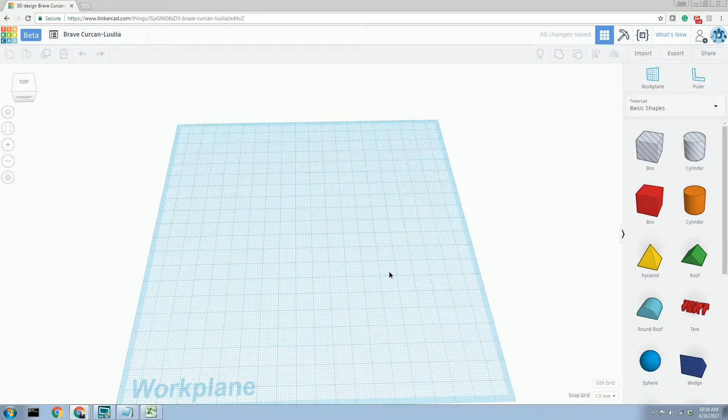And here is our workspace. We've got our blue work plane here, a piece of paper if that helps you visualize what we're going to be doing and where. You can make this a bit bigger with Edit Grid. It is by default 20 centimeters by 20 centimeters. You can also change everything to inches. I tend to leave everything in millimeters because at the sizes we're working at, it's a little easier to look at 1 or 2 millimeters versus 1/72 of an inch or whatever. So I leave these all the same. Go ahead and cancel.

You see me moving the work plane around here. These are the camera controls. I'm doing this by holding the right mouse button down and dragging my mouse. If I ever get all discombobulated, I can come up to the top left corner. There's the home view. Give that a left click and it takes me back to the home view. I can also zoom in and out using the scroll wheel. I can also do most of these with the hardwired buttons in the viewer itself. If you come over here to this box in the top left corner, you can drag that around as well. They also have the zoom in and out buttons here, and then they have an orthographic view which takes you straight into each axis there.

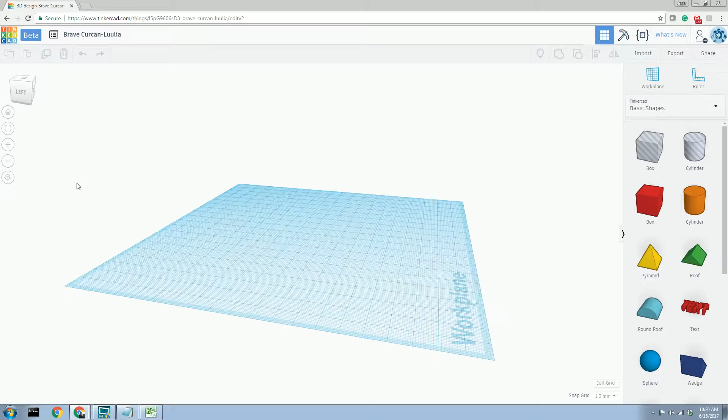I tend to use perspective for about 98% of everything, and then maybe orthographic if I'm trying to make sure I've got two different models joined together or sections put together correctly, so when I go to print it I'm not getting a gap somewhere I'm not expecting.

Up here at the top, if you click this TinkerCAD button, this will take you directly back to the landing page. This says beta. Like I said before, this used to be called their beta editor. They just haven't removed the tag. My designs here, if you click that, will pull up everything you've got in your design gallery. And next to it here, whenever you make a file, TinkerCAD automatically generates a name for it. Brave Curcan-Luulia. To change that, you just click on it, and we'll type in 28mm barrier video. Now, because it is cloud-based, every time you make a change to your design, it is automatically saved.

Underneath the title here, these buttons have shortcut keys that I tend to use more often, but you can use the menu buttons here. So copy, paste, duplicate, Control D, that's useful. I don't know if we will cover it in this video. Delete, and then everybody's favorite button, undo, and then the second favorite button is redo.

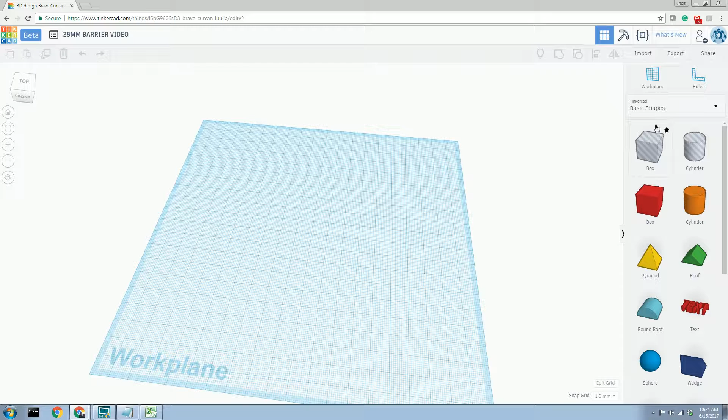Share, you can email the file or do a couple other things. I tend not to do much with that. It's usually just export. Under these we have what they used to call the helpers, work plane and ruler. We already have a work plane by default. Like I said, it's kind of your piece of paper, but you can adjust that. You can bring a shape down and put the work plane on a different axis, and then that changes things around. I've never actually had to use that, so I don't know much about why you would do that.

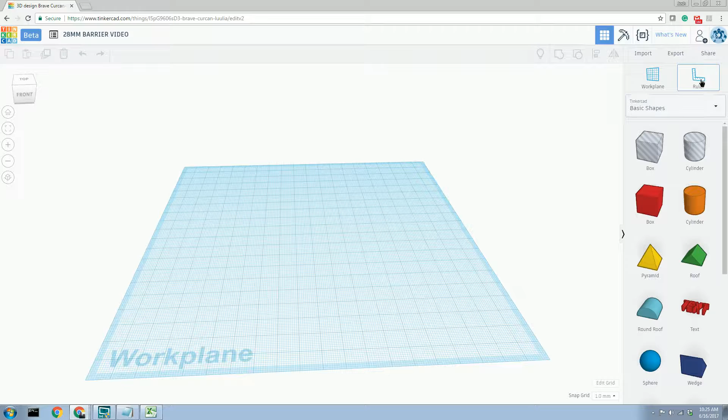Ruler, incredibly useful, and that'll be our first action here. We're going to pull the ruler onto the work plane by holding the left mouse button down while hovering over the ruler and just dragging the mouse over to the left corner. If you don't have the ruler down as you pull shapes in, you don't have the measurements, and it's a lot harder to change the measurements. If you're just playing around, you definitely don't need it, but if you're trying to make something fit to a specific size, you're definitely going to need to pull that ruler out. And you can remove it, so if you decide you really don't need it, you can just hit that little dismiss ruler there and it goes away.

Underneath this is your menu options for your shapes and actions. Everything we're going to do today is under these basic shapes. Other design programs call these your primitives. Your box, your cylinder, round roof, cone, polygon. You will maybe notice if you're looking at some of these round objects, they're actually faceted. That is one of the biggest limitations of TinkerCAD. There's a couple workarounds which we'll cover in another video, but it is something to be aware of.

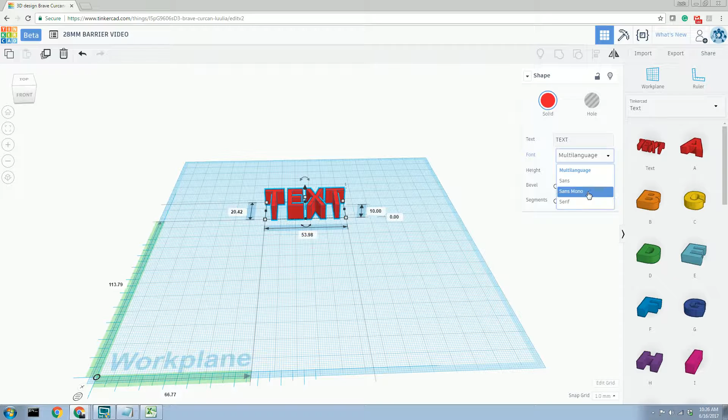Text next. So they have a text generator, which is kind of nice, so you can write out your phrase or your string of text, and it automatically does it. There's a couple of fonts that you can choose from. Just pull that out. Not anything you'd be really familiar with, but a sans serif, a monotype, and a serif one. Just go ahead and delete that. Or, especially if you're doing single letters, you have individual letters that you can pull onto the work plane and string your phrase together. In another video, we'll cover making text in a different program and importing it into TinkerCAD, so you can choose your font and stuff like that.

So symbols, we're not going to run into a lot of these for wargaming terrain. Connectors and extras, we'll cover in different videos, but they do exist, and feel free to take a moment and play around with it. Go back up here to basic shapes. So, like I said, we're going to do a jersey barrier here, and I have found at AmericanConcrete.com this fancy little JPEG that gives us all the real world 1:1 scale dimensions of a jersey barrier. Now for 40K, 28 millimeters is nominally 1:56 scale, but if you've ever played 40K, GW kind of does whatever they want with their scales. So I tend to use 1:40 for the terrain because it looks a little beefier and fits a little better with the aesthetic of the rest of the things going on.

So I have already taken the liberty of creating a spreadsheet with the 1:1 dimensions broken down into all the popular wargaming scales. So here's my 1:40, 1:56 or 28 millimeter scale, 1:72 or 20 millimeter, 1/100th for 15 millimeter, and 1/285th for 6 millimeter. So this one's going to be in 1:40 scale. The next one I do will probably be in 1/100th for Flames of War and that type of thing. So let me go ahead and minimize that. I'll go back to TinkerCAD here.

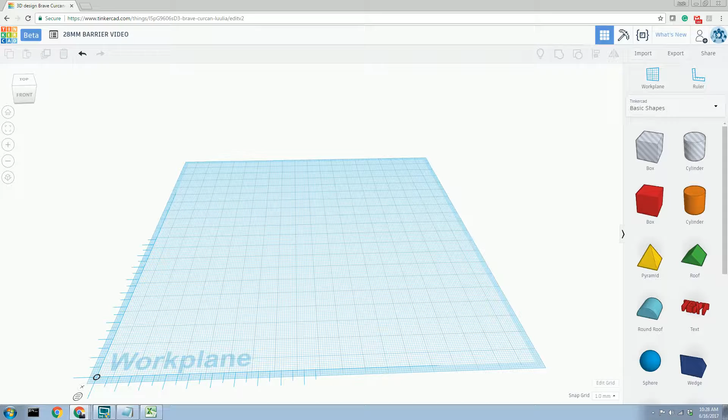So let's go ahead and start building our Jersey barrier. We're going to start off with a box, and we're just going to pull that onto the work plane like we did with the ruler. So we just hover our mouse over the shape, left click, and drag it on. When we do that, a whole bunch of stuff shows up around our box. Because this is a three-dimensional program, remember, you'll now have the x-axis, the y-axis, and now the z-axis, or the vertical axis. By default, everything you pull into TinkerCAD is 20 millimeters.

So around the perimeter of the object, we have these white boxes with black outlines, and in the middle of each axis here, we have these solid black boxes. The white boxes with black outlines are our two-dimensional manipulators. What that means is I'm going to hover my mouse over one of these boxes here, left click, and move my mouse. And as I move it, I can change the dimensions in the x and y axis. And if I slow down and do that, you can kind of see the dimensions change there.

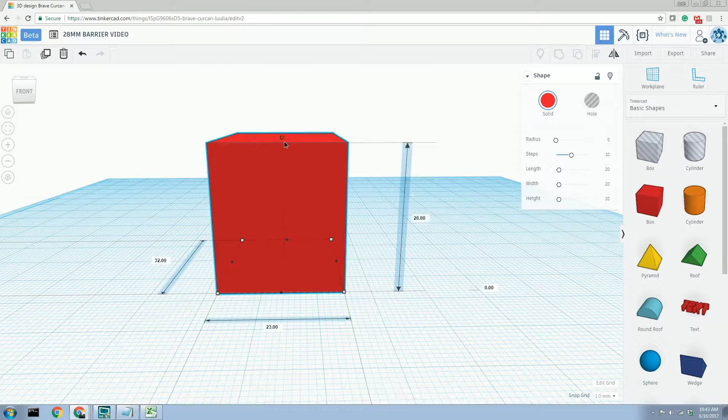The solid black boxes are our single axis manipulators. So same deal, I hover my mouse over, left click, and as I move my mouse, I'm just making this box longer in the y axis. However, to confuse the situation, on the top, or if you're looking at it from the bottom, you get this white box with a black outline, which should be a two-dimensional manipulator, but it's not. So when we click that, it just makes the z-axis longer. My assumption there is the white box with the black outline, as opposed to a solid black box, will help it be a little more visible and usable that way.

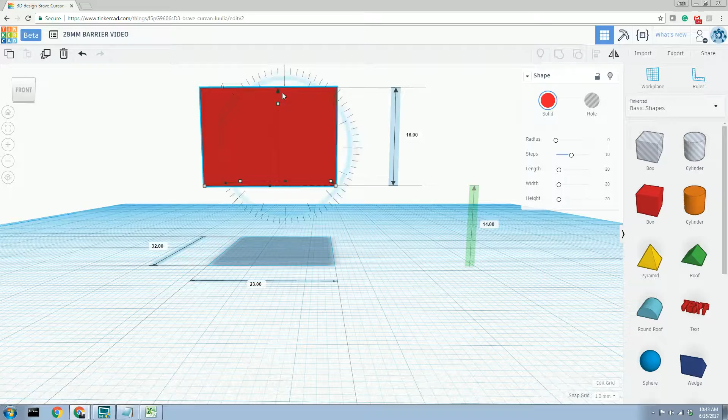Above that is the little black arrow shape, and when we click that, it will physically lift the object off the work plane. And as I do that, over here, this field becomes active, and this is your height off the work plane, or I guess it could be under the work plane as well, because you can put things under the work plane. And that is, of course, denoted by the negative in front of the number. To change any of these dimensions, I can also simply click into the respective text field. It'll highlight the number and I type in my new dimension. So in this case, I want this to be flat on the work plane, so I will type 0 and hit enter, and there we go.

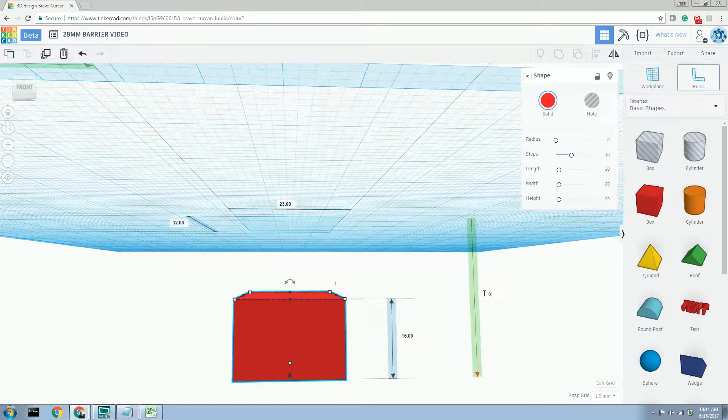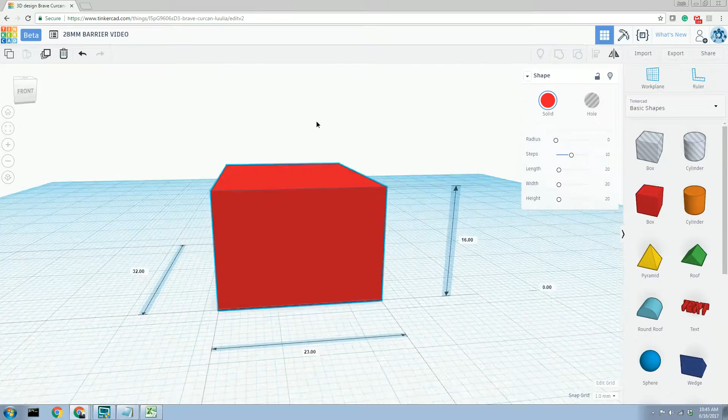I'll zoom back real quick over to our Jersey barrier, and we're going to look at this. So we know that the base of our Jersey barrier here is 10 feet long by 2 feet wide. I'm going to go back to my little scale here, and I know I'm going to need this at the 1:40 scale in millimeters to be 76.2, or exactly 3 inches long, by 15.25. So I'm going to leave this up in my second monitor, but go back to TinkerCAD, and let's go ahead and get this. So our x-axis will be our length here, so 76.2 by 15.25.

So looking at our scale drawing here, we see that the base of our Jersey barrier, the little rectangular shape, is 3 inches. Now, doing our math, that ends up to be just slightly under 2 millimeters. I'm going to go ahead and flub that number and make it 3 millimeters, both for printing and just to give it the correct appearance as opposed to direct scale. So I'm going to come back over here to TinkerCAD, click in the z-axis, and hit 3 millimeters. And there's the base of our Jersey barrier. That doesn't look like much yet.

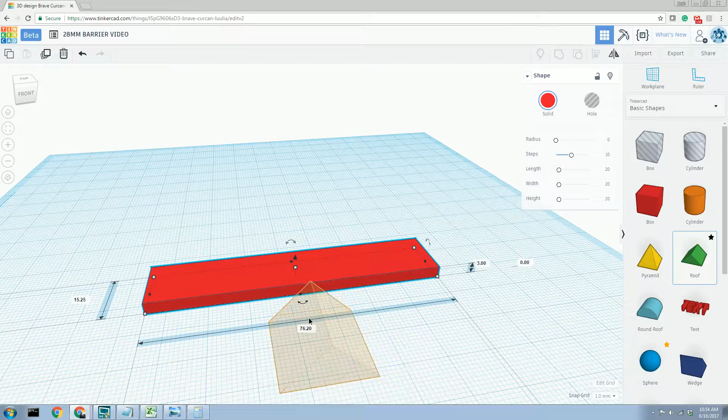So I'm going to go back to our picture here, and the next shape we're going to try to get is this kind of pyramidal shape here. So I'm going to come back here, and luckily they have the perfect option already for us, the roof shape. I'm going to left click that guy and just drag him on the work plane. Now he is at the wrong angle for us to use. So that'll cover how to change an angle of an object.

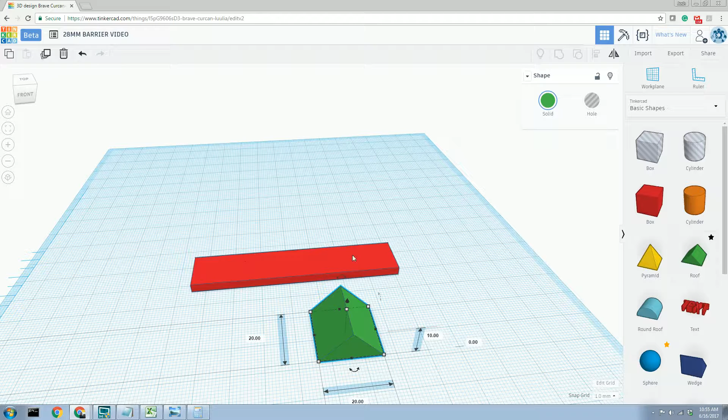So as you kind of look around the shape, you have these curved black arrows. These are your angle manipulators, and depending on what view you're looking at an object from, 1, 2, or all 3 manipulators will be visible. So I'm going to kind of look around, and I need to change my roof here to be parallel with the rectangle we made.

So this arrow looks like it's going to do the job. So I'm just going to left click on the curved arrow, and I can do this 2 ways. I can hold the left mouse button down and move my mouse. If I keep the mouse close to the object that I'm turning, you'll see it does these 22.5-degree jumps, which if you're trying to just get to like 90 degrees or 180 degrees is by far the best method to

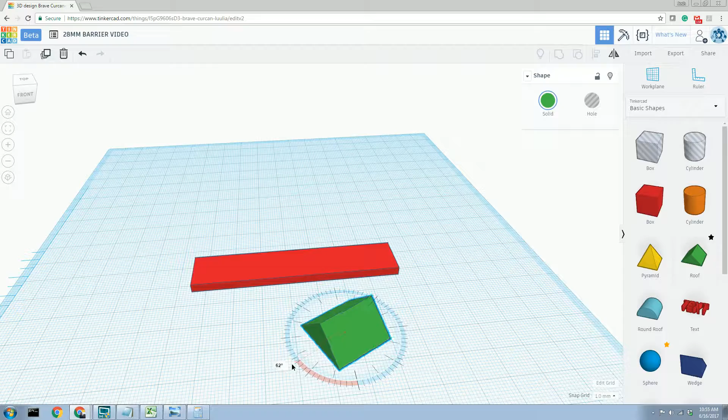do. But if you're trying to do stuff a little finer controlled, if you pull the mouse outside the ring that surrounds, the little protractor ring, it will allow you to do single increment adjustments here. So I'm going to go ahead and get it to 90. So we have this, the correct orientation, perfect.

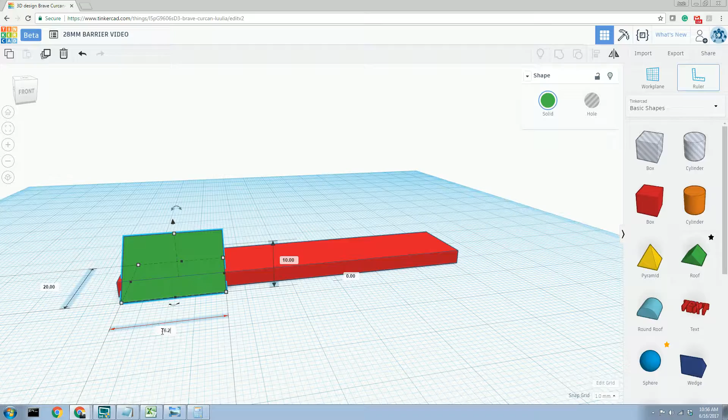And I'm just going to drag this kind of onto our base. It doesn't have to be perfect. So, in fact, I think I got that a little too close. Let me just, there we go. Now we know this is going to also be the 76.2 millimeters long, the 3 inches long. So let's go ahead and get that there.

So I'm going to go ahead and we're going to lift this roof shape, the triangular prism shape here, off the rectangle. And again, to do that, I'm just going to grab that little black spear shape and just kind of pull it up. So I can look at my chart, or I can just click on the rectangle again. Maybe, there we go. And I know that's 15.25, so I'm just going to click our roof and click 15.25 again. And you'll notice when I do that, the alignment shifts.

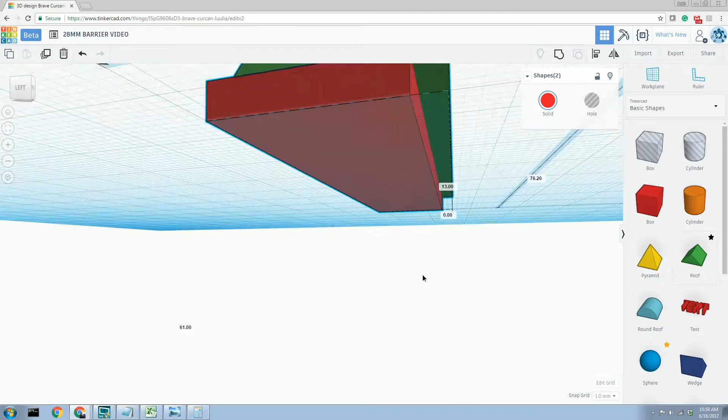So I can do the alignment again. I can draw the selection box, or if you have a lot going on, a lot of shapes on here, and the selection box will just be too big of a tool, you can simply hold the shift button down and click each shape. And now you can tell they're both selected again because of the blue halo around everything. Must not have clicked it. And sometimes the alignment marks kind of move on you. There we go.

Go back to our drawing. We see this shape last for about 10 inches, more or less. Again, we can't perfectly copy that kind of curved angle there, but again, we'll get it close. So 10 inches tall. I'll pull up my little cheat sheet. And we know 10 inches is, in 1:40 scale, about 6.3 millimeters. So I'm going to click the triangle, and I'm just going to click over here and hit 6 millimeters. Well, we're starting to get somewhere.

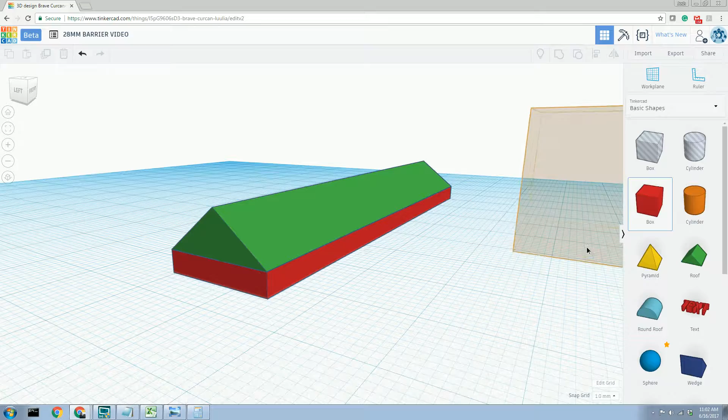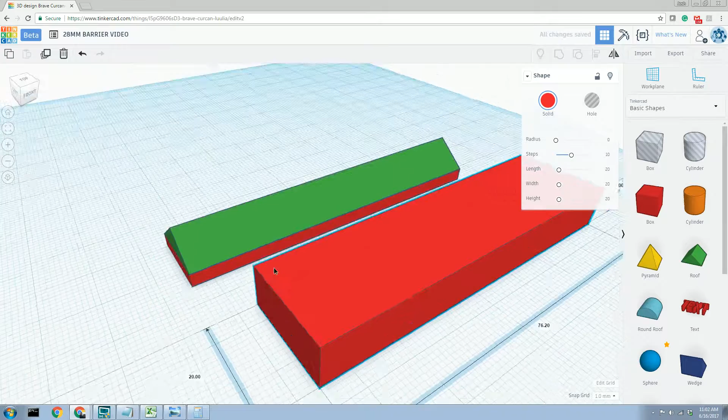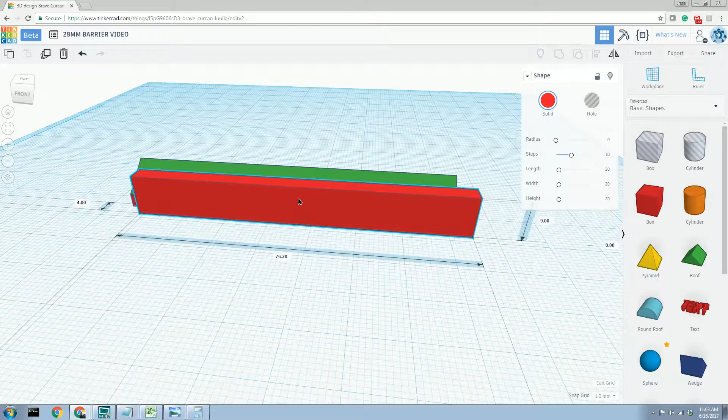But we need to figure out what the y-axis is. So I'm going to come over here and see that 6 inches is 3.81 millimeters, or we'll say 4 millimeters. So let's go back to TinkerCAD, and the y-axis is 4 millimeters. Let's move that around. Good. I'll kind of drag this over, and we'll use the align feature here in a second. And then I'm going to drag.

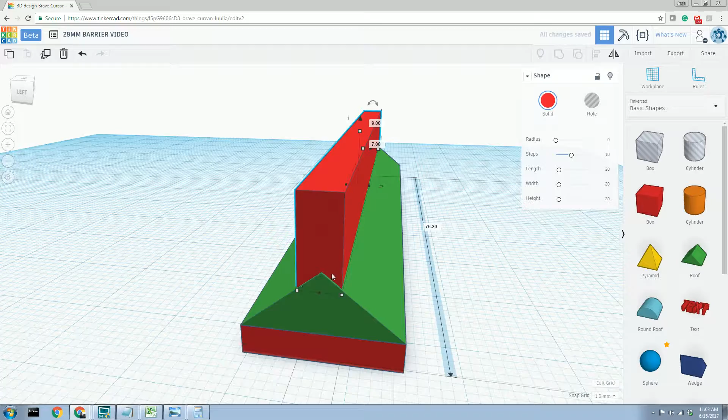Now this is going to be a little less precise. I'm going to grab my arrowhead shape and pull up, and I want to kind of truncate that pyramid shape. Get this all aligned again. There we go. And we have a very Christmassy looking construction barrier, and fix that. We can do a couple things, but the reason it does that is by default all these shapes come out in whatever color they show up as in the basic shape generator over here on the right.

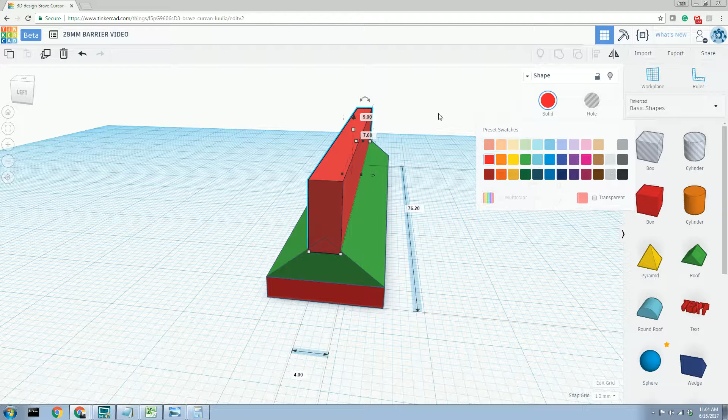To change that, we can click each individual shape and come up here into what they used to call the inspector, and there's a solid or hole button. We'll cover the hole in a minute, but you can just click the solid button and choose whichever color you'd like. This will have no effect on how it prints, just kind of like a black and white copier. It comes out in whatever color filament you have in the machine as opposed to whatever's on the screen.

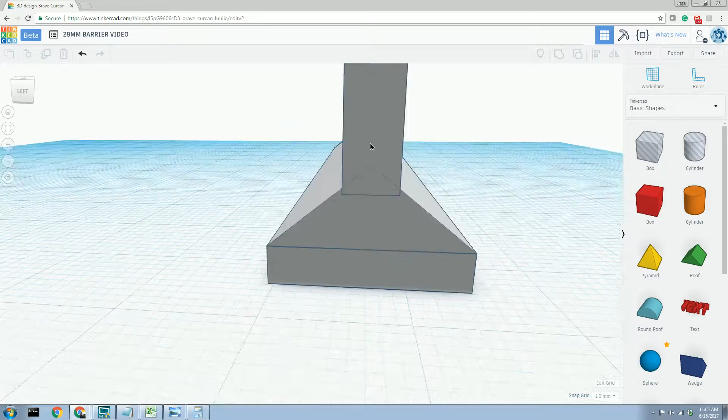I'm going to go ahead and click gray, and I can do this each individual one, or I can select everything and come over here and choose gray, kind of give it that shape. Now I'm looking at this and I feel that this vertical part here, this vertical rectangle, isn't long enough. It just doesn't have the right feel for me. And that's a lot of times in scale work more important than being truly accurate, especially for wargaming and stuff like that. We're going more for the impression of the object as opposed to a perfect tiny scale replica.

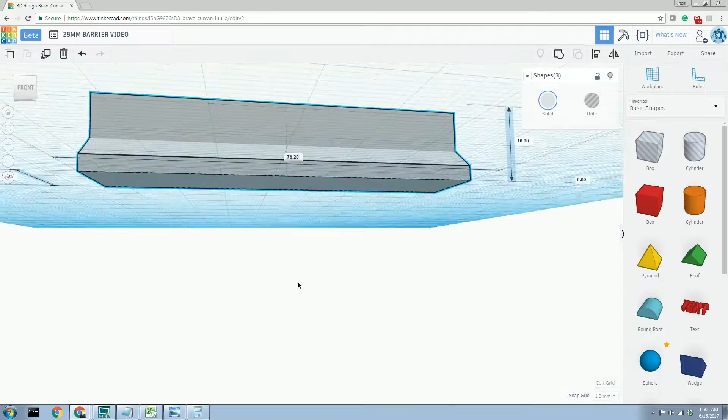So let's go back to my little scale drawing, and so our overall height then should be 2 feet 8, which was the 32 inches, which is, pull that up, 32 inches, so it should be about 20 millimeters tall altogether. So let's go back to TinkerCAD, and to find out if the entire shape is that, I'm going to draw the selection box over everything, and so it looks like putting this rectangle, the top portion of the wall, kind of under the pyramid has caused that problem. That's probably about 4 millimeters there.

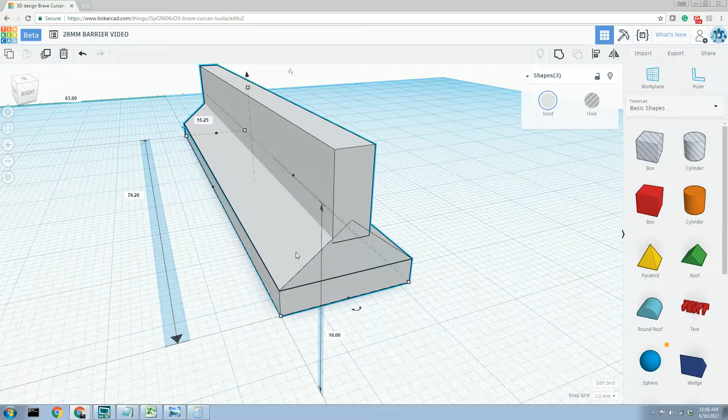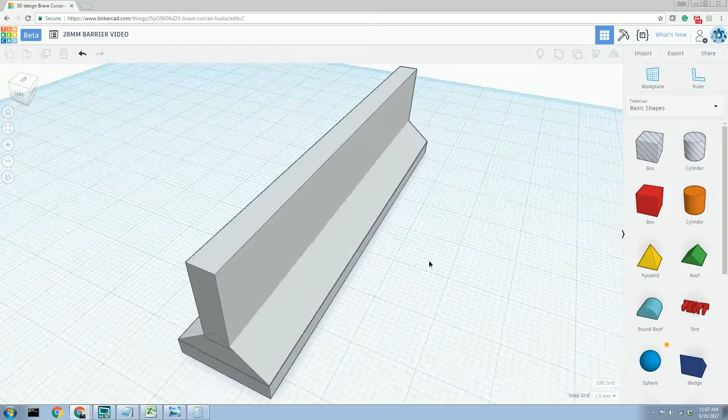So I'm just going to go ahead and select away, because if I start messing with these numbers, it's going to change the overall feel of the whole shape and skew that. So I'm going to click off to the side and just click my top rectangle here, and we're going to add 4, so we're going to make that 13, and there we go. And now that's starting to look the business, and that's perfectly usable as a jersey barrier in a game. I'd be perfectly happy with this on the table. Quick coat of gray primer or gray spray paint, and a quick wash, and you're good to go. But there are some other details that we can add.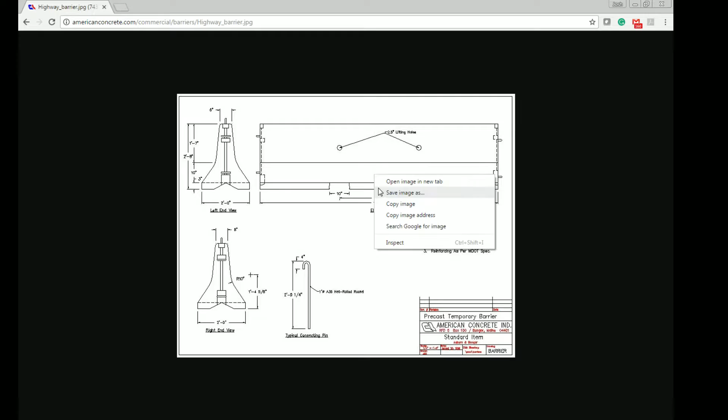So you have the forklift pockets. I'm sure the grim darkness of the 41st millennium still uses forklifts, so they have to move these things somehow. And then these little lifting holes. Now the lifting holes I could go either way on. At 2.5 inches, they're fairly small. They're going to have to be exaggerated, and I don't know if it'll add a lot to the finished model. We'll show you how to put them in, but if you do a true 1/56 scale, it'd probably show up, but anything smaller than that, I wouldn't even waste your time. You're more likely to end up causing printing issues than anything else, or the slicer will just completely ignore it.

So we'll put in both. I'll show you how to do both. But if you're worried about your printer or them not showing up, I wouldn't even worry about it. Like I said, they don't add much. So we know our fork pockets here are 10 inches wide, and we know that base was 3 inches tall. So we'll mimic that on the model.

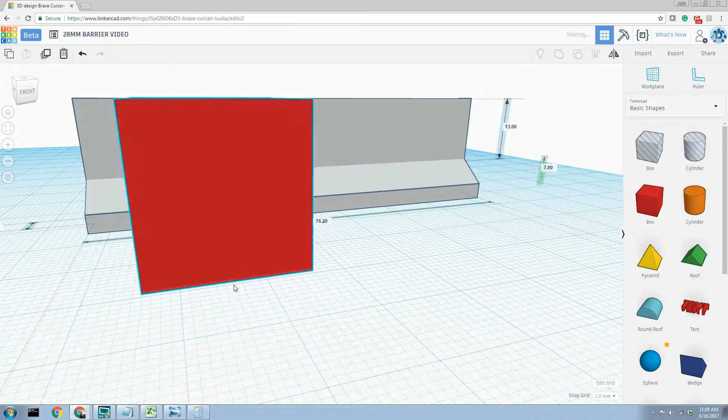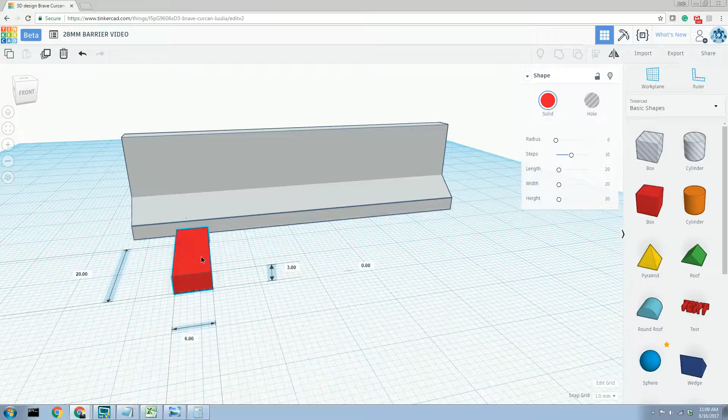So let's go back and pull up my cheat sheet, and we know 10 inches is about 6 1/4, 6.3 millimeters. So Tinkercad. Let's pull out our box here, and first thing we'll do is make the x-axis 6 millimeters, and we're going to make the z-axis 3 millimeters. And I'm going to show you 2 ways to do this. It kind of depends on your printer and a couple other things, but let's go ahead and get these put in first, and then we'll get to that. So I'm going to pull this over.

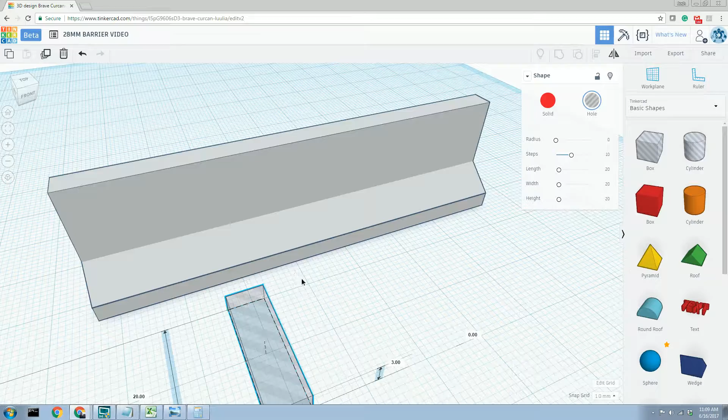So what we're going to do, and this is one of the nicest features of Tinkercad, is make this a hole. And with a single click, we're now cutting a shape out. Other programs call this a Boolean. You usually have to pay a decent amount of money for a program that does this well. Tinkercad does it pretty well, so I'll often design an item in a different program and then import it into Tinkercad and use it to cut the holes and kind of finish the model.

So what does a hole mean? Well, it simply means that there is a lack of space in this defined shape. Now on the blank work plane that doesn't really mean anything because you're already in a lack of space, but as soon as I put this in the model, you'll see that you get this little shadow indicator here.

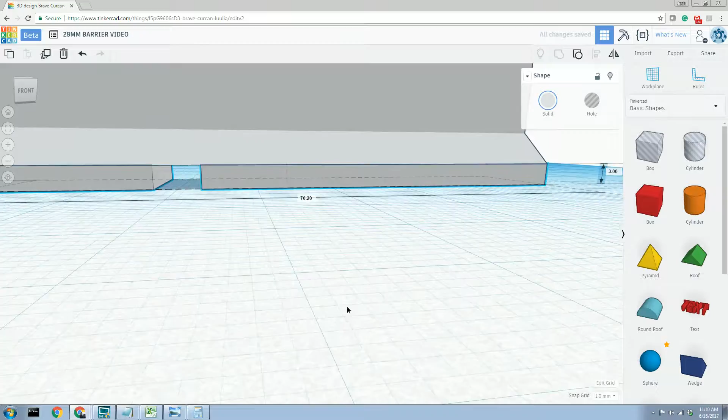And what that's going to do is, I'll jump ahead real quick just so you can kind of see it, I'm going to click on the base here and click on the hole. I'm going to come up here and hit group. This might take a second. But now, peekaboo, we can see all the way through. I'm going to hit undo because we need to get these aligned a bit.

So there were 2 fork pockets. Close my cheat sheet there. And it looks like they are 40 inches apart, or 1 inch, or 25.4 millimeters. So we can use that. Let's go back to Tinkercad. And then I'm just going to click my little fork pocket shape, and I'm going to hold the control button, and I'm going to peck the D button real quick.

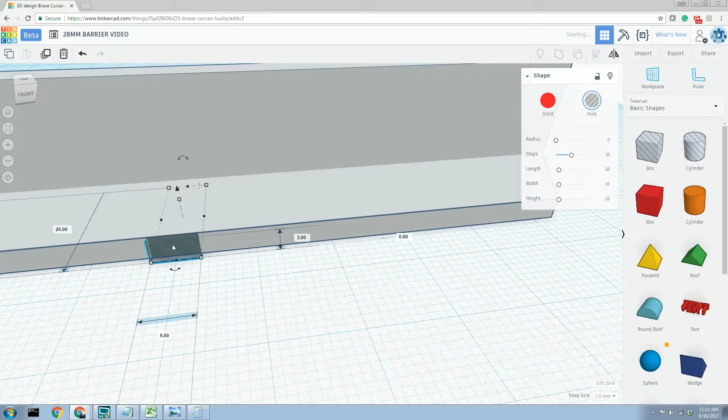Doesn't look like it did anything. You may catch the quick orange flash that shows up on the screen. That's duplicated our shape though. So now I'm just going to use my right arrow key and kind of shift the object over. And now you see we have 2 identical shapes, and this is nowhere near right yet, but that kind of gives you the idea. Now as I'm moving these, you'll notice they're moving in millimeter jumps.

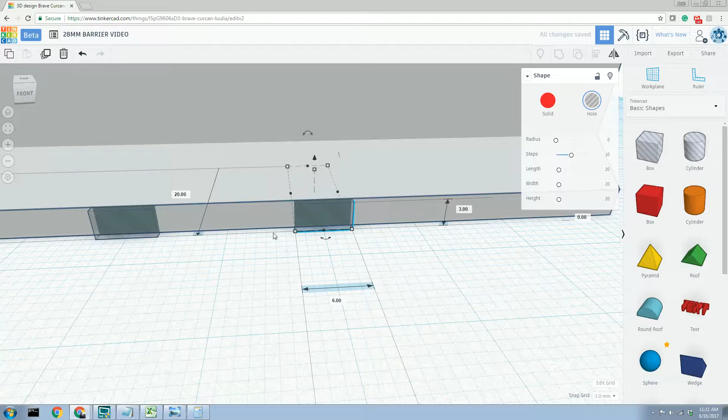Each one of these small squares here is a millimeter, and we scroll out a little bit here. My distance from the ruler, which remember we put in this bottom left corner here, is moving at a millimeter a click. We can change that. We come down here to the snap grid, and we can change that to 0.1, and that's usually useful for pretty fine movements. So we said we were 40 inches apart. So we want to get that in the middle.

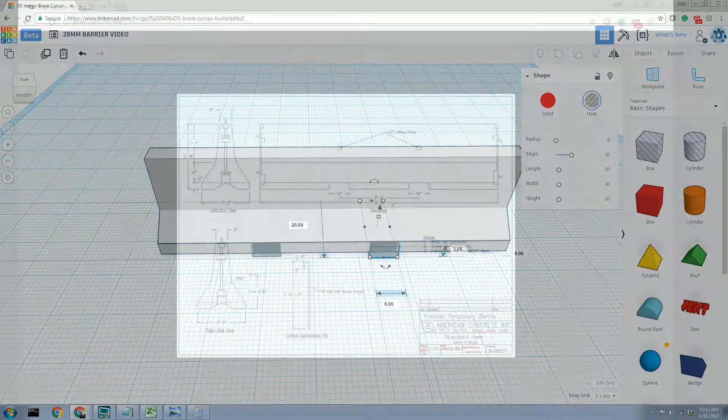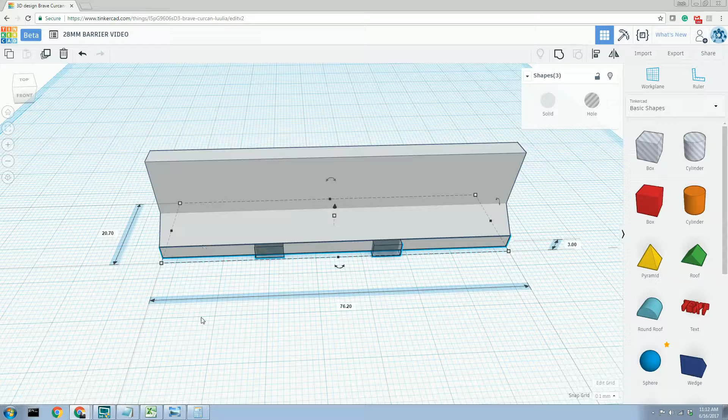And let's see, let's go back to my drawing real quick. And it looks like they don't give us a dimension from the edge. So we're going to have to do a couple tricks for that. So what I'm going to do is, I don't necessarily want to draw some boxes to measure. So I'm going to select our base and our 2 pockets. I'm going to come up here to align, and I'm going to click this, and what that's going to do again, it is going to perfectly center both of our boxes.

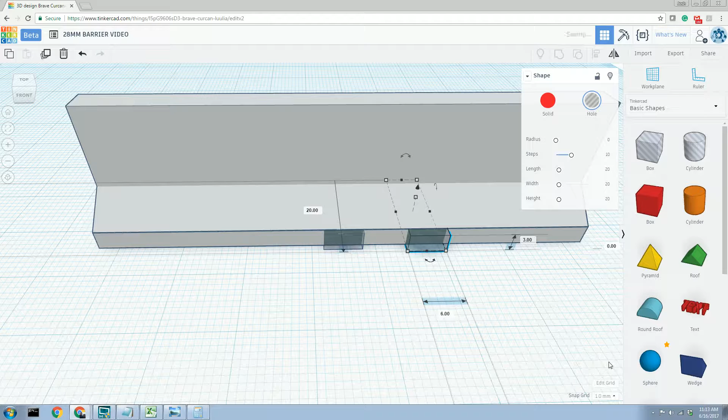And then I'm going to click off to the side. I'm going to click a single box. And so we said it was 25.4 millimeters, so we'll half that, and we'll say 13 millimeters. I'm going to come back down here to the snap grid, change this back to 1 millimeter, and I'm going to click my right arrow 13 times. 1, 2, 3, 4, 5, 6, 7, 8, 9, 10, 11, 12, 13. I'm going to do the same with the other pocket, but going in the opposite direction.

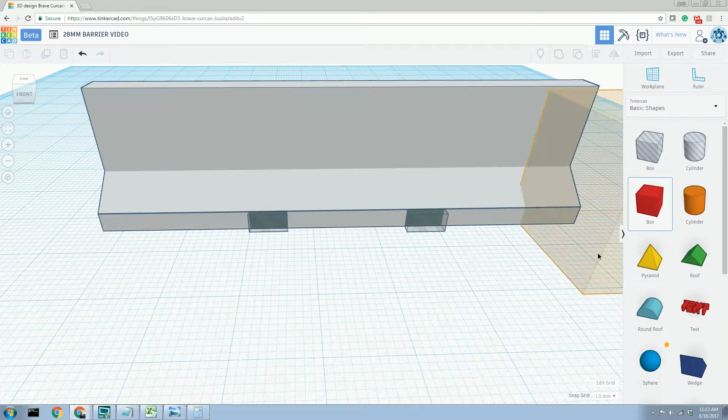I could also have zoomed out a little bit and come to the ruler and just type the number in there. But so now we should be 26 millimeters apart. And one of the great failings of Tinkercad is there's not like a snap to ruler that I could just use to measure. But we can just pull out a box here, and I'm going to type in, we say 26. Click just that base. Don't click the pockets. Click our measuring box here, and then hit align and center.

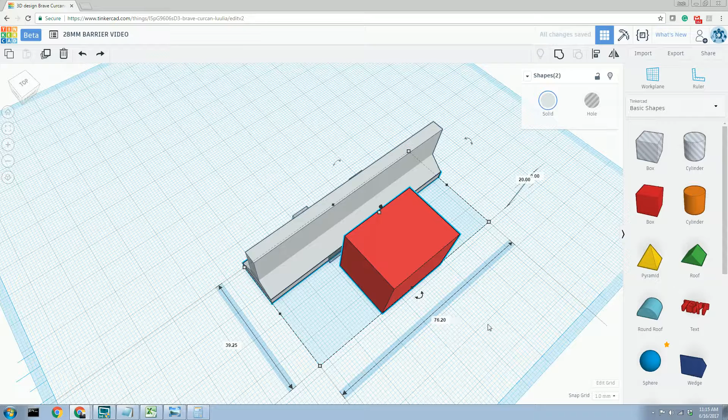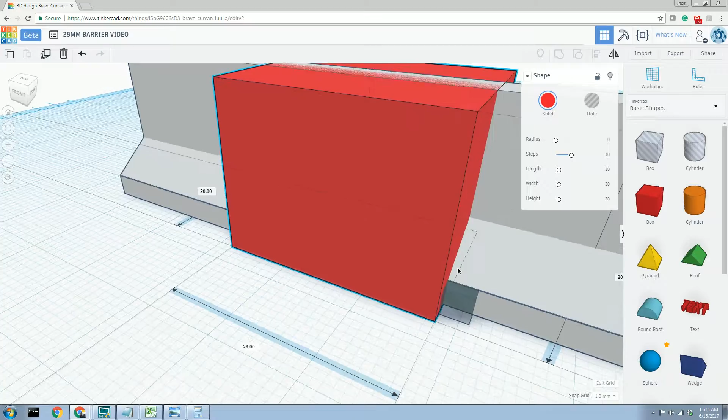And I'm going to clear my selection. Click my box and just move it in real quick. And so if we look here, it looks like we got 2 and a hair and 3. So let's move this one, and there we go. I'm sure there was a mathematical way of doing that, but this was, for me, just as quick. So I'm going to click our little ruling box and hit delete. Alright, so we have our fork pockets in. They look pretty right. Again, if they're off by a tenth of a millimeter or so, you're probably not going to be able to tell.

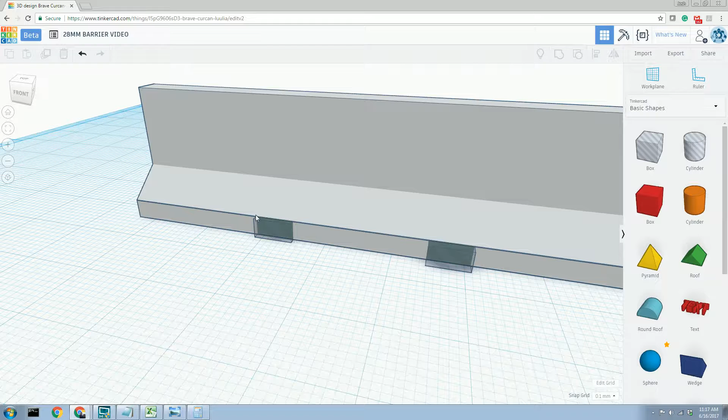Now for printing, this is a pretty easy shape for any printer to do, any FDM printer. The only issue that you might have is the fork pockets going all the way through. You may end up with some spaghettiing in there, or some other issues that you may not want, especially if you don't want to put supports in there and have to worry about the supports. Something like this, you probably want to print 5 or 10 depending on how big your printer is at one time, and just be able to pop them off the plate, give them a quick wash and paint them.

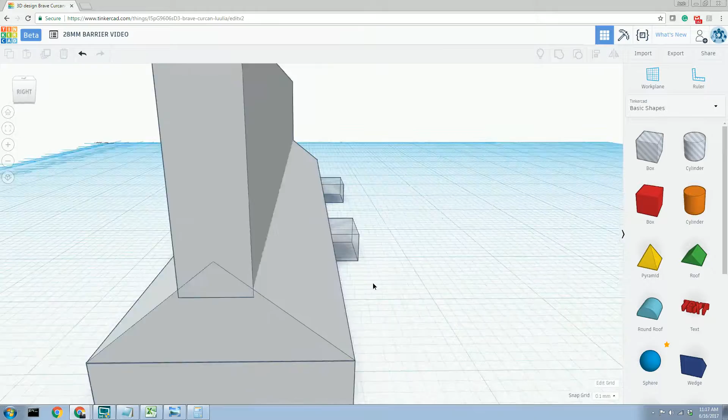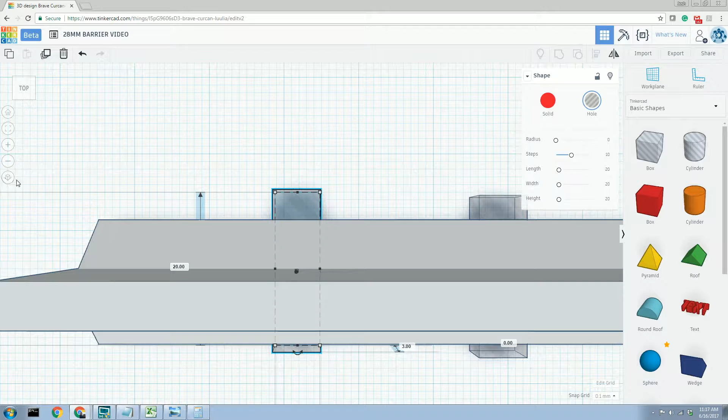You don't want to remove supports or anything like that. So if you want to avoid that, we can just leave these as kind of shallow depressions to give the impression of the full fork pocket without the issues printing that. So to do that, I'm going to kind of go straight up, or I can come back to my top, make sure this is orthographic view, and so now we have a straight top down just like you were drawing, and I'm going to pull my pocket out a bit,

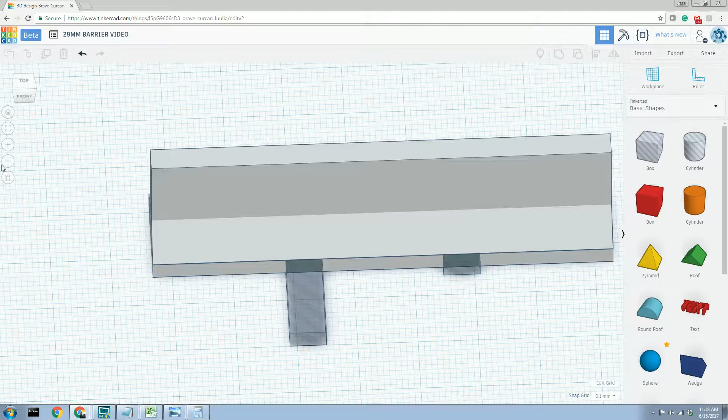and let's say as soon as you click, you kind of change the orthographic. So to do that, and this works in a perspective view, if you hold down your middle mouse button, you kind of recenter the object, and there we go. Makes it a little bit easier to see. So I'm going to click my fork pocket again, and you can kind of see here is the outline of our pocket once it's inside the shape.

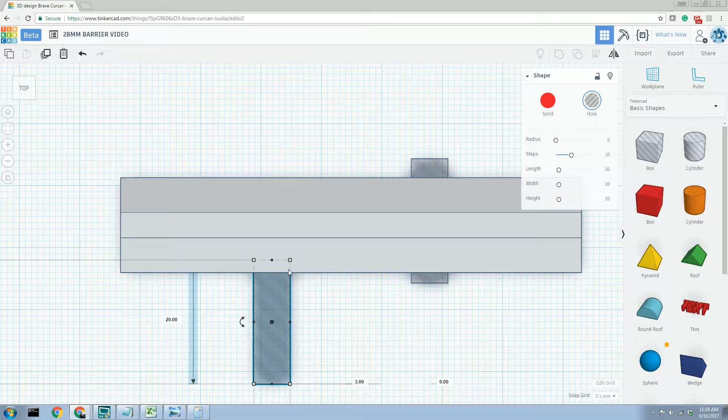So I'm going to just kind of pull this until there, and I'm going to come back to our single axis manipulator here, and I'm going to shrink this so it is about flush with the outside of our base. And now I know this pocket is 2 millimeters deep, and that honestly is probably too deep even if you were just going for the impression. So let's go with 1 millimeter,

and looks okay. Then we're going to do the same thing over on this pocket. We're going to pull it down just a bit, get this flush with the front, and just for consistency's sake, hit 1. And now, let's come back over here. Click that pocket, hold shift down, click the second pocket, hit Control D to duplicate those, and then I'm just going to use the up arrow key, kind of move these.

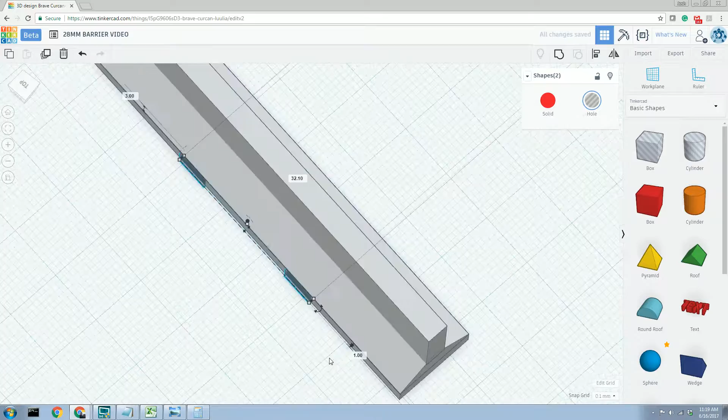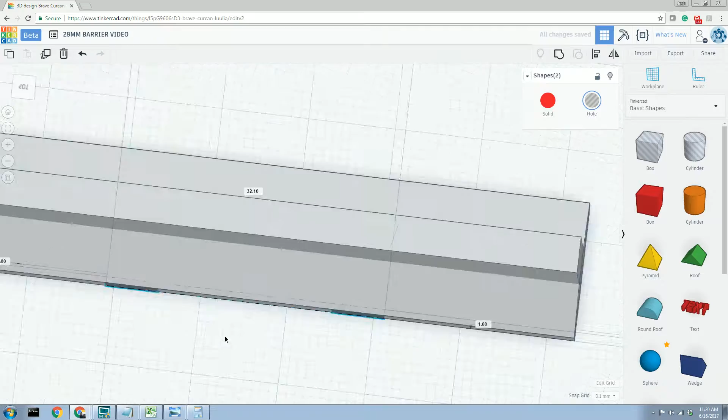Alright, I'm going to change my view so I can get a little better idea of where we're at exactly, and click in just a couple times. I had changed my snap grid to 0.1 as well to make it a little bit easier so you're not jumping in. And those look pretty good. I may be able to go in a, nope. Alright. So now, I'm going to look underneath. You're only going to have this small overhang here, as opposed to the 2 large gaps that may cause problems. My printer does it okay, but I totally can see why other printers wouldn't, and why borrow trouble if you don't have to. So we're just going to leave that like that for now.

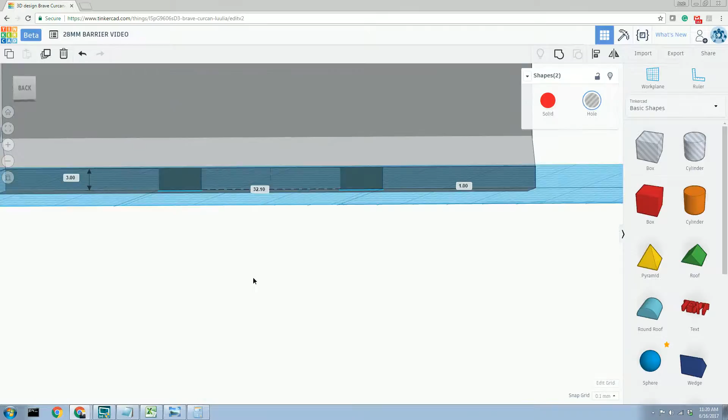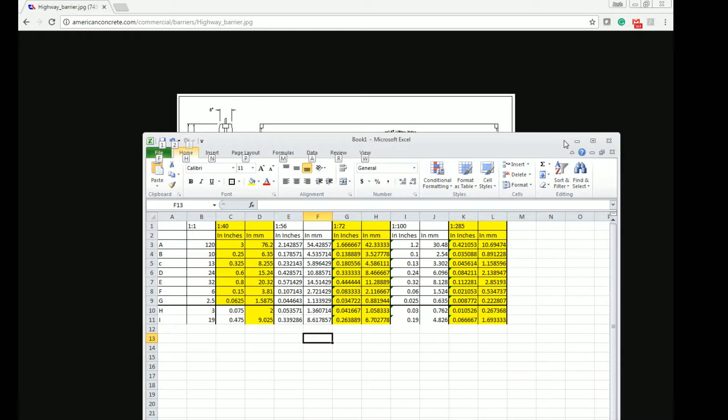And then for the last part, which is totally optional, is these 2.5 lifting holes here. We'll show you how to align to other objects using these. So let's go back to Tinkercad, and jumped ahead of myself there a little bit. 2.5 is 1.6 millimeters. So let's go back, and we're going to pull a cylinder out now. So let me zoom out a bit, and we're going to pull a cylinder out.

Like I said, as you do that, you can kind of see by default there are, I guess, 20 sides. You can move this slider here on the inspector to 64 sides. That makes it a little better. But you want at least like 128 sides, if not more, for it to have the visual impression of a perfect cylinder or perfect circle. But at this size, we're fine. It's not going to be a big deal.

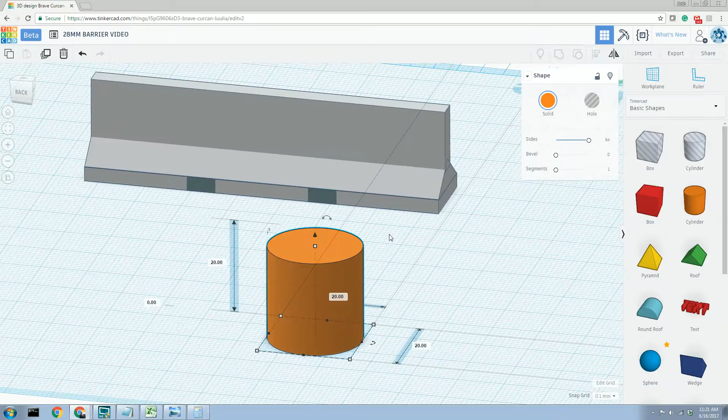So I'm going to go ahead real quick and change my orientation to, here we go. I'm going to keep the mouse close into the shape because I just need a quick 90 degrees or negative 90 degrees in this case. And maybe get a little bit closer. Okay. Now you'll notice that we still have the X, Y, and Z measurements, even though this is a cylinder. And cylinders are usually done with just the diameter and the height, or the Z-axis.

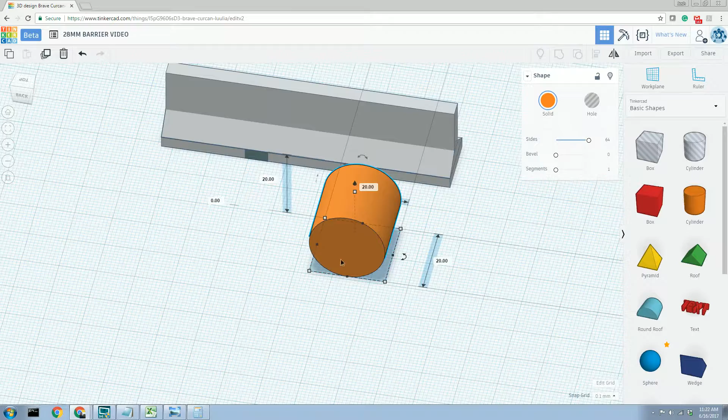I run into this teaching this program to people all the time that aren't used to graphic designs, but remember their geometry class with diameters and stuff. Got to throw that out. You still have an X and a Y axis that have to be matched to have a perfect circle, or as close to a perfect circle as Tinkercad will. Because if you don't, let's go ahead and make our X-axis 10 here. And you end up with an oval.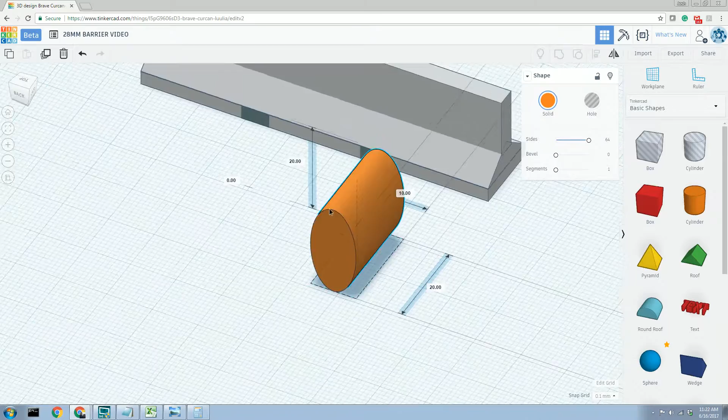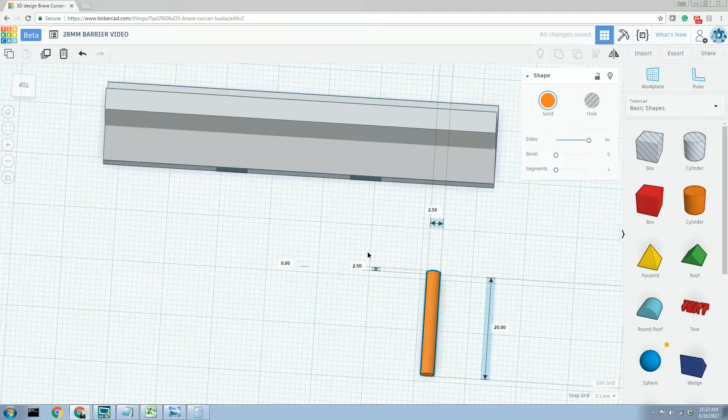And that may be what you're looking for. If you're trying to get an oval, that's how you do it. But you need to remember that both axes need to be the same if you want a perfect cylinder. So we said this was 2.5, and we're going to change the Z to 2.5, and perfect. Go ahead and leave this at 20 real quick, and I'm going to drag it around, kind of get it close to where I want it.

Change my view a little bit, and we're going to pull this up a bit. Now I'm not going to go for whatever the exact measurements were. I'm going to align these holes based on the fork pockets with their spacing in the middle here, and then align it with the middle of our rectangle here to get them kind of spaced where we want.

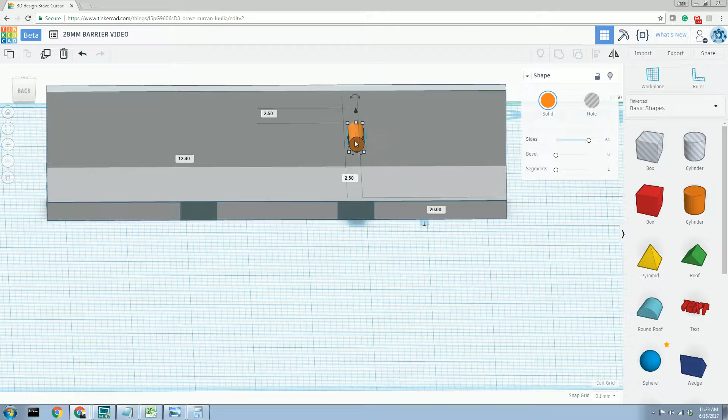So I'm going to change this to a hole, and I'm going to hit Control D, not Control Delete, and just drag the second one. Again, kind of just eyeballing it. Now, I'm holding the middle mouse button down to kind of move the center. And let's go ahead and use this orthographic view and zoom out.

All right. So I want to align these holes based on the fork pocket and not necessarily the left, center, or right justification that Tinkercad allows you by default. So to do that, I'm going to hold Shift, click on this fork pocket, and then click on my lifting hole, align, and I'm going to click this middle button here because that corresponds with the middle of the fork pocket. And now that's perfectly aligned with the middle of the fork pocket.

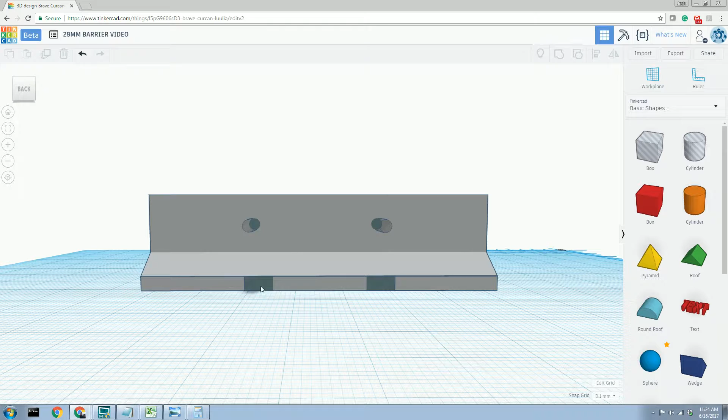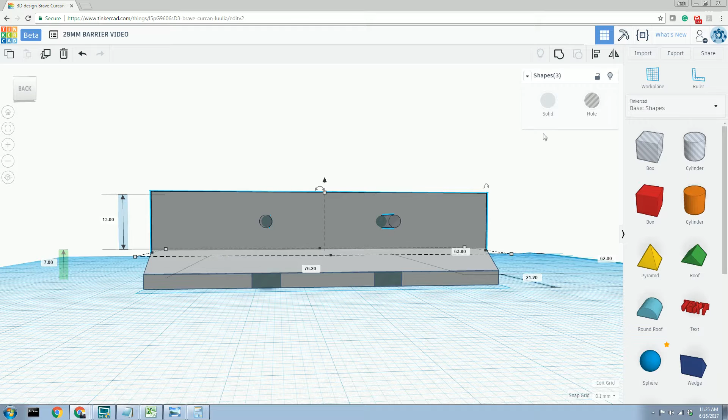Same deal, Shift with the fork pocket, Shift with the lifting hole, align, center. And then clear my selection, Shift on the rectangle that we made the vertical portion of the wall with, click the holes, same deal, align, but this time we're only going to do the Z-axis alignment to make sure they're kind of centered with that guy, and click.

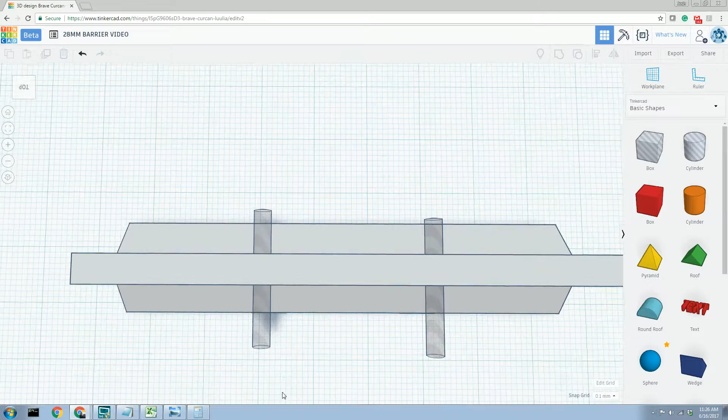We don't need these holes going all the way through. We definitely don't, because that will cause some printing issues. So just like the fork pockets there, I'm going to go back to my little top orthographic, click on the cylinder, click the Z-axis, and just kind of pull it somewhere in the middle for right now, and grab the other one and get it flush with the outside of the wall. Same deal over here.

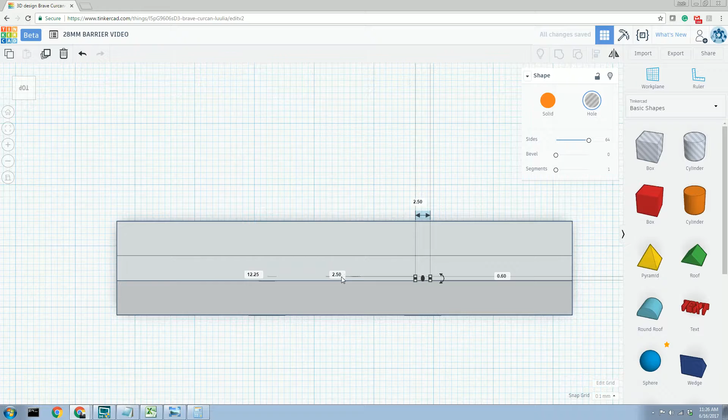And for this one, I'm going to use the down arrow to make sure it's cutting all the way through the outside surface there. So I'm seeing this shadow shape. Looks like it's this one over here. So that was at 0.6, that's close enough, but for consistency's sake. And looks like it moved it. There we go.

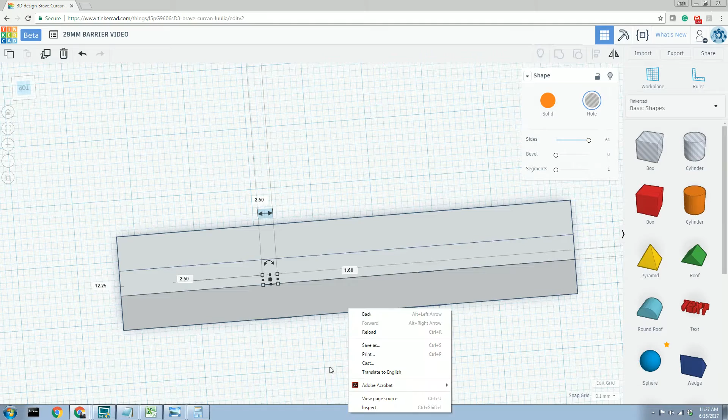Click on this guy. So it's a little deeper. Looks like it's pushing it into the wall, so I've got to arrow out a bit. Just enough to where you can kind of see the shadow shape. And then I'm going to hold Shift and click the other hole again. Control D for duplicate. And mouse up through. And change my perspective.

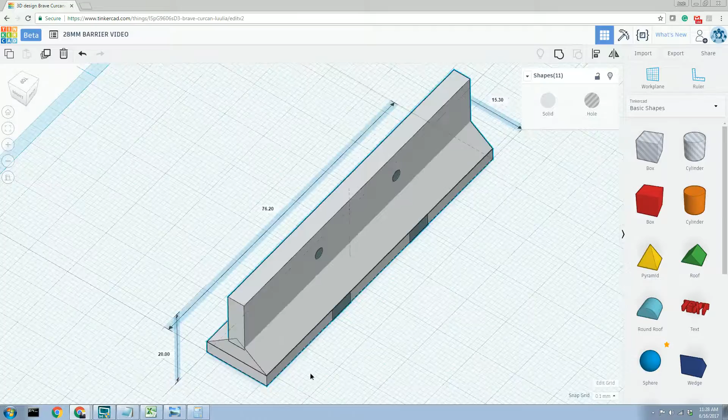And there we go. I'm going to draw my selection box one last time around the whole shape. Kind of pan around and look at our handiwork. Not too bad. I'm going to come up here to this button here, the group. You can also use Control G. Like I said, this finalizes. This turns our collection of shapes into a single shape. So I'm going to hit group.

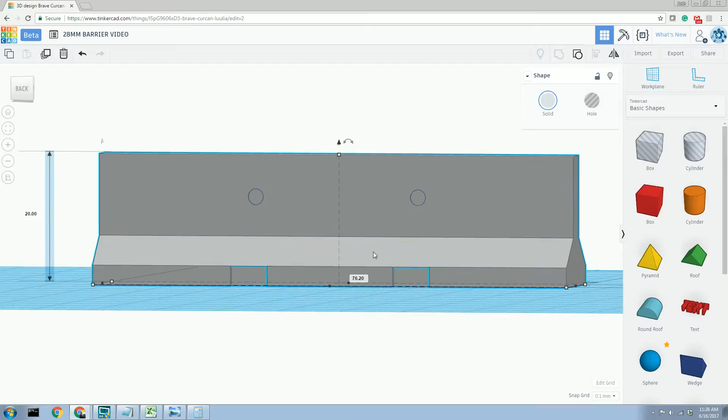And depending on what you're doing, it can take a couple seconds. This was fairly simple, so it was pretty instantaneous. But there is our jersey barrier. Not too shabby. And when you're done with it, you wanna 3D print it. You're gonna come up here to export,

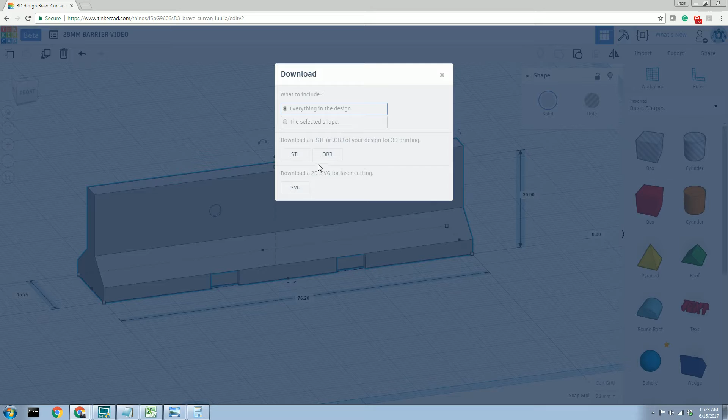and depending on what you're doing, make sure you either have everything in the design, or if you have just a single item that you had selected and wanted to print, then you obviously use this selected shape. And then download in STL or OBJ. This is a fairly simple shape, so STL will do it just fine. And there comes my dialog box, and I would hit save. That's not where I want to save it, but I'll have this printed up here in a little while, and hopefully have that added to the end so you can kind of see what it looks like.